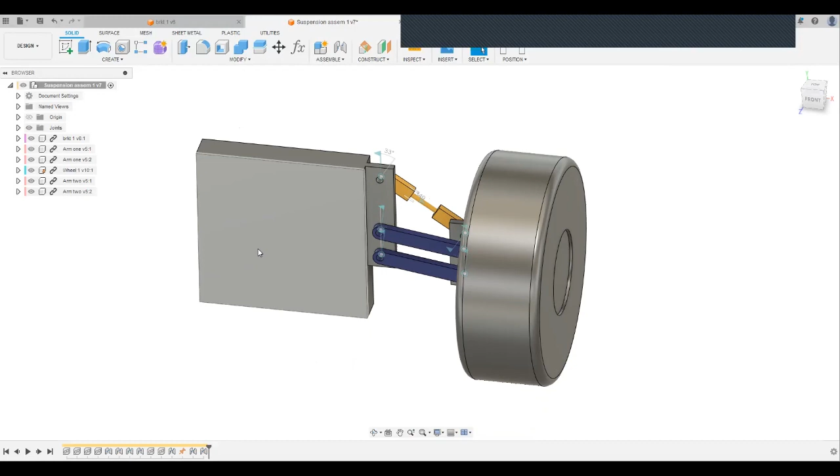Hello everyone. Today we will be looking at an example of using joints in Fusion 360 to simulate motion and some linkage and kinematics between different parts.

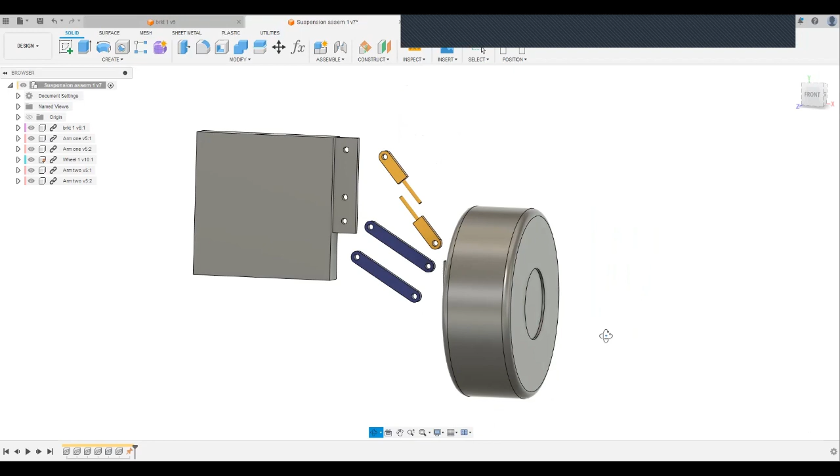This is an example of a race car wheel. There will be 4 of these assemblies, but this is just one quarter of the car. I'm going to spin around. You can see there's a bracket 1 on the left, arm 1 is in blue, the wheel is on the right with a bracket, and then arm 2 is yellow, which is going to simulate where the spring and damper are going to go.

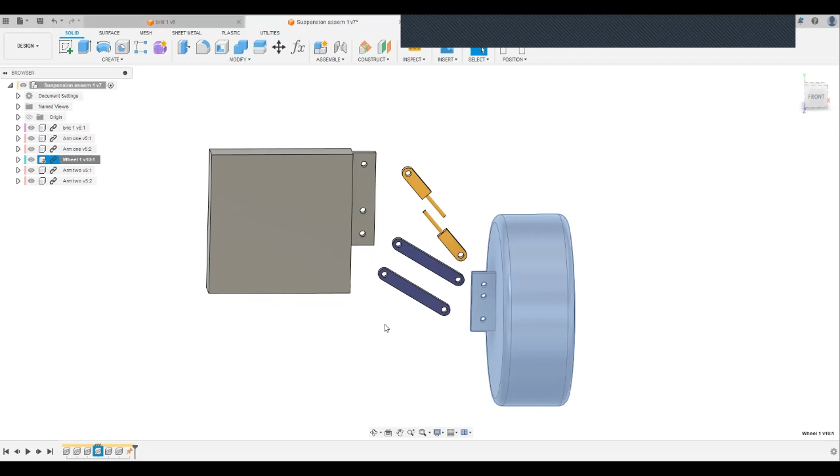Right now the components are free to move. This is inside an assembly. I'm going to unground the wheel. Actually, it's grounded — you can see a red pin next to it.

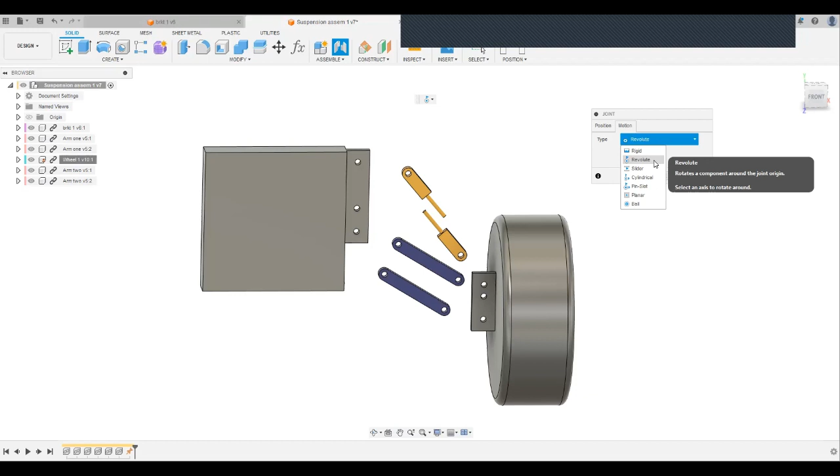So first we're going to go to joint. There are different kinds of joints. We're going to be doing a revolute joint today. The first 3 are simple ones, the later ones are more advanced. We will be using a revolute joint for things that spin around in a pin or bearing.

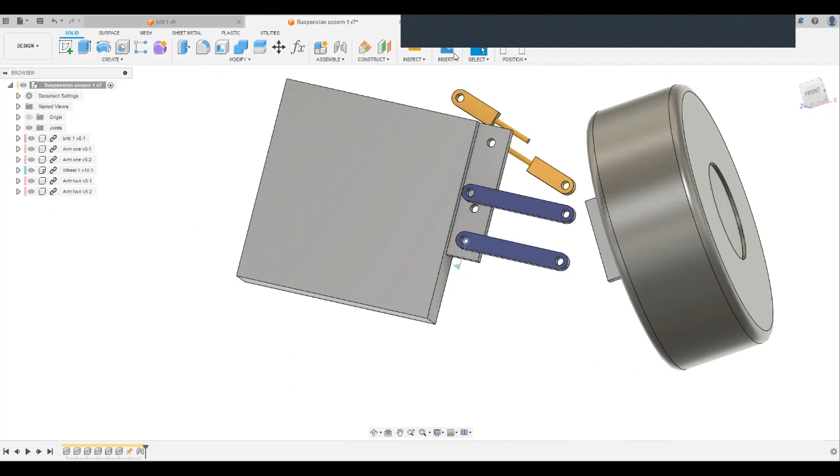First we're going to click on the edge of the bracket and then one of the edges on those blue arms. Hit apply. Let's do that again: go into revolute joint, click on one edge of the bracket and then the backside edge of that blue arm. Hit OK.

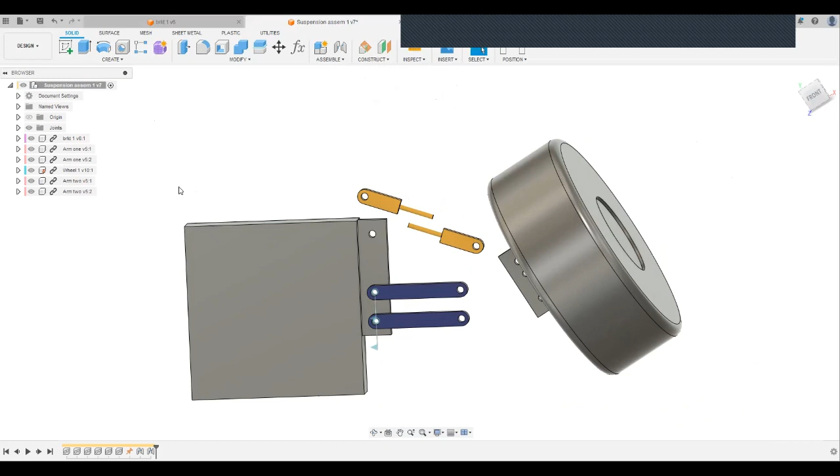You can't tell right now, but those are in a revolute joint. If we ground bracket 1, anytime you move components, Fusion's going to ask if you want to revert or capture that position. Doesn't really matter in this case, just say capture.

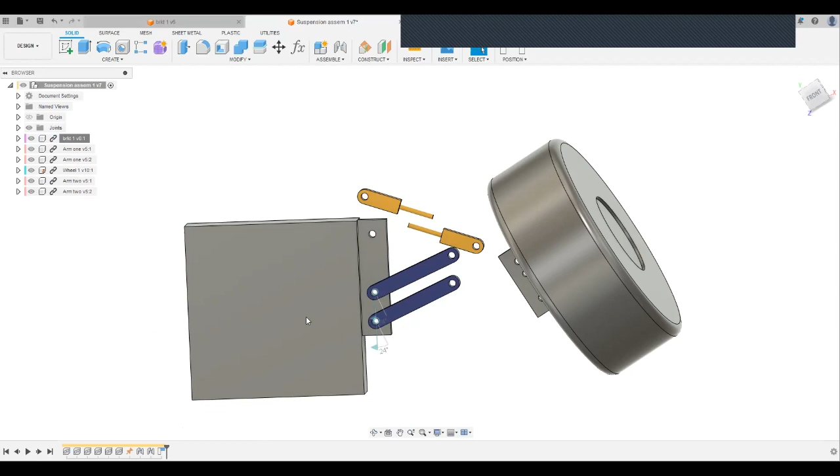So I've grounded the left bracket and you can see the arms spin around in those pins. I'm going to unground the piece, or I can delete it in the history tree in the bottom left. Right now only the wheel is grounded.

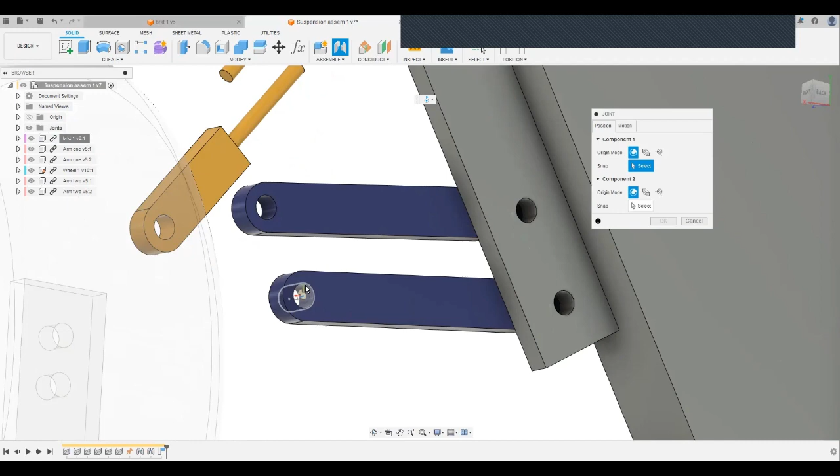So again, we're going to apply another joint, just check the type is revolute. The wheel is grayed out or ghosted so we can't select that yet, but we can select the blue arm. Click the edge on there, click the edge on the wheel bracket, and then say OK. We could flip it if we need to, but not in this case.

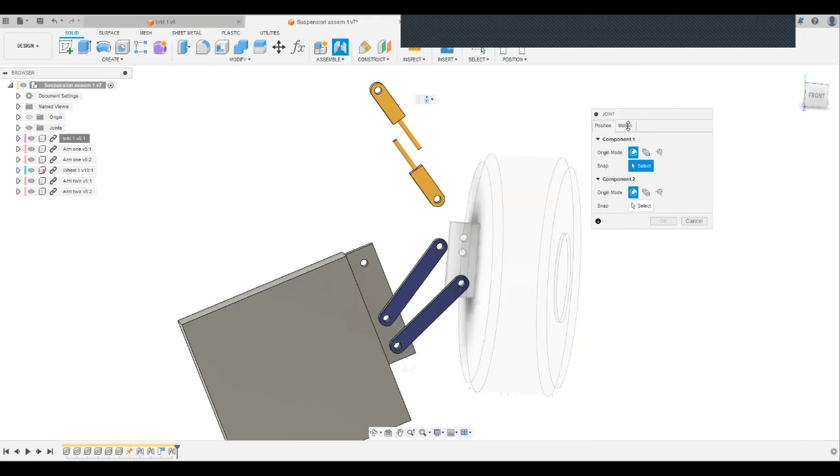Now you'll start to see some motion coming together. We're going to add another joint, check it's a revolute. Click on the edge of the hole on the blue bracket, and then the circular edge on the wheel bracket. Say OK. Now you can see that parallel linkage coming together — think of this as a double wishbone suspension.

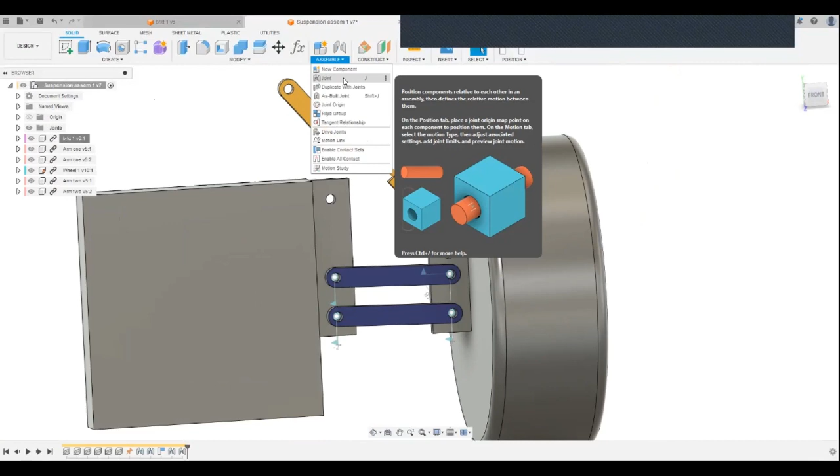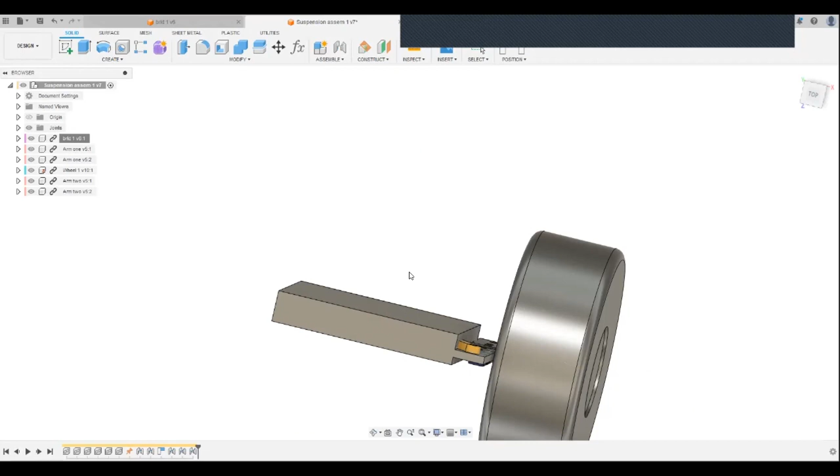Now let's look at those yellow arms. We're going to apply a revolute joint, this time on the back side of the bracket because we don't want those arms to run into each other. Here I'm just trying to simulate motion, but it's a little squirrely because it's not complete with the joint, so it's not a fluid movement yet.

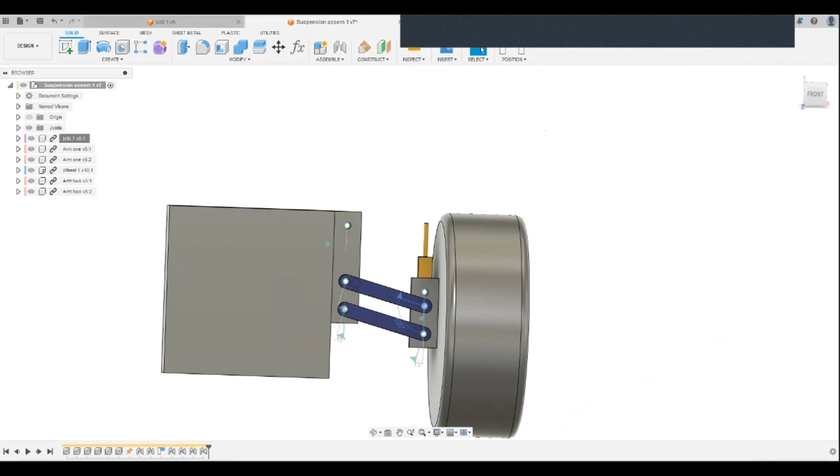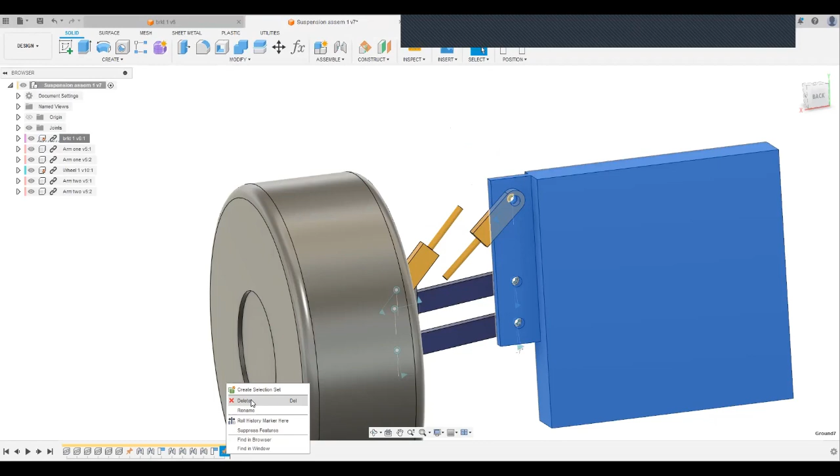I'm going to apply another joint to the other yellow arm and to the back side of that wheel bracket. Say OK. Here I'm trying to get that yellow arm to spin out of place. It's not doing what I want it to do, so I'm going to ground the rectangular hunk of material, and now I'm able to spin it around and then delete that grounding so it's free again to move.

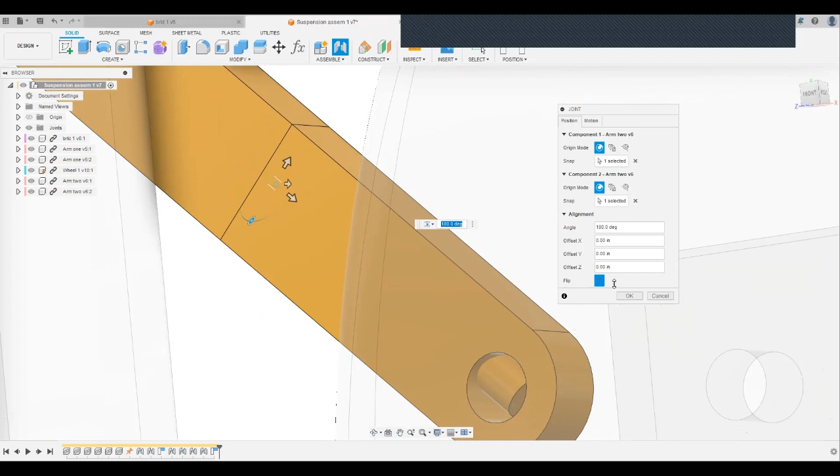So we're going to insert a joint, this time it's slider. We're going to click on the rectangular faces that are closest to each other. Make sure to click in the middle point, and they match the corresponding point. Now we've finished all our joints for the whole assembly mechanism.

Here we see the motion that we expect. The yellow is going to be the spring or shock and compressed when the chassis drops. You can see the angle numbers change on those little teal flags, and then there's a dimension on that yellow arm — I'm just giving a rough number.

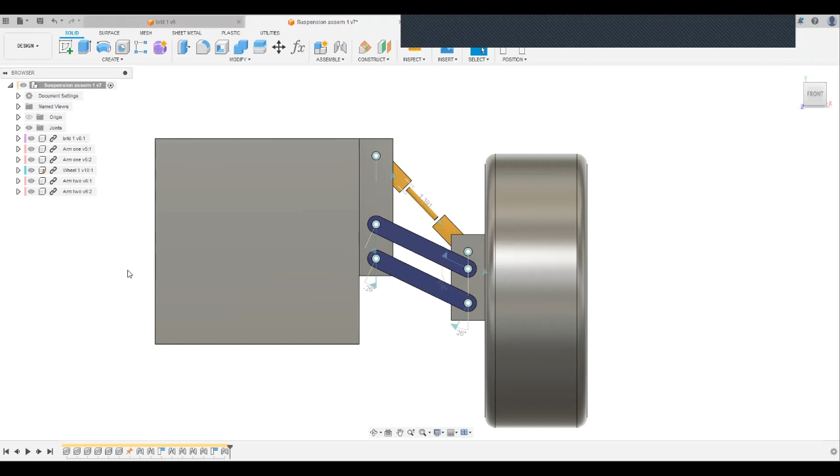So we're going to switch the relative motion. I'm going to unground the wheel and then ground the bracket on the left. And now we can see it from the chassis point of view — the wheel and the linkage are going to be swung up when the wheel goes over a bump.